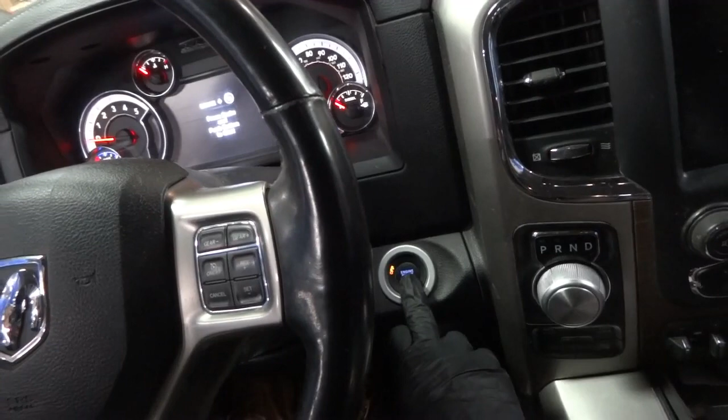Alright guys, so now we're going to confirm the customer's complaint. I'm going to step on the brake pedal and I'm gonna push this push start button. After stepping on the brake pedal, if you push this start button twice, the truck is supposed to start. So let's see what happens. I can hear the fuel pump running. I don't know if you can hear it. So I'm pressing the push start button. Nothing is happening. Okay. So customer's complaint confirmed. As you can see, the truck doesn't start. So we have confirmed the customer's complaint.

Now, one thing I noticed was when we pushed the truck inside the shop, I noticed that there are messages here on the dash. There is a message here that says service transmission. Let's wait. That message is going to be displayed right there. Service electronic brakes. And then there's another one that says service transmission. So there are a bunch of lights on the dash right now. So there's that light, service transmission, continue in drive, do not shift or turn engine off until you reach a desired location. You may not be able to shift again until serviced.

So basically what that is saying is that whatever is happening is telling the driver to drive to a service facility, because if the engine gets turned off, you can't start it again. And that's what happened actually, because when the customer got here, she turned it off. After that, it became a no crank, no start condition. Okay, so it looks like there's something going on with the transmission.

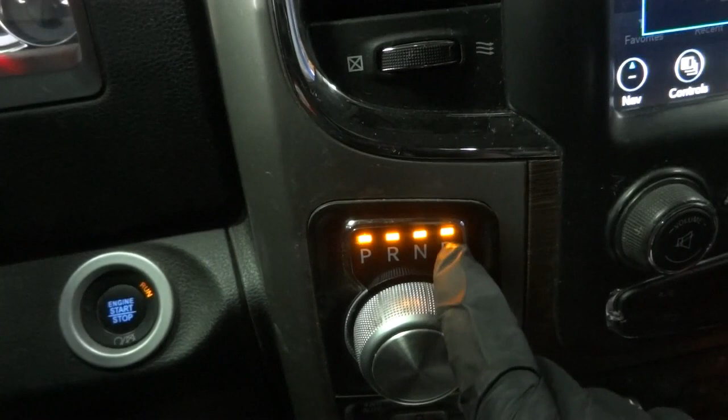The other thing I noticed is when you look here on this gear selector, you will see that all these lights are lit up. Okay, the park light, the reverse light, the neutral light, and the drive light. So basically, this tells me that there are modules here that don't know what gear the transmission is in. Okay, so we're most likely dealing with a communication problem, because you have all these lights lit up like this.

So on a good working truck, when you are in park, only the light above the P comes on. When you are in reverse, the light above the R comes on, and so on. Okay, so if you see all of them coming on like this, it means there's a problem.

So now that we have confirmed the customer's complaint, I'm going to get a scan tool connected to the truck so we can read the codes. I'm gonna connect the scan tool and then I'll bring you guys back up. Alright, so I got the scan tool connected to the vehicle, so I'm gonna bring up our scan tool here.

So I need to make sure that I mention this. Whatever is causing all these lights to come on is what's disabling the vehicle from starting, because right now the truck doesn't start because of all these lights that are on. I'm sure what's happening is that the other modules, like the ECM for example, don't know what gear the transmission is in. That's why this truck doesn't start.

Okay, so I'm pretty sure something went wrong with the transmission, or something is going on with the transmission control unit. The ECM has disabled the engine to protect the transmission. Okay, so this doesn't start. The no crank no start condition is being caused by whatever is causing all these lights to come on. Once we can figure out what the problem is on the transmission side, this truck will start. The ECM is not starting the truck because it doesn't know what gear the transmission is in.

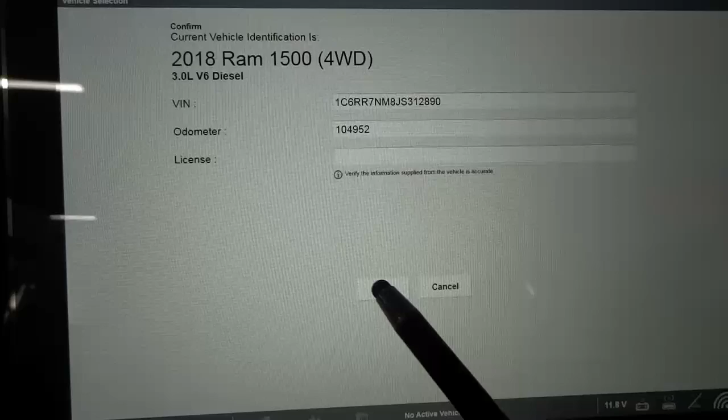So now let's scan this. Alright, so right there the scan tool has identified the vehicle, so let's click OK. Since we have a couple lights on the dash, I'm gonna do a code scan. This is gonna scan all the modules on the vehicle. So let's give the scan tool a couple seconds until it finishes. Alright, so the scan tool is done scanning all the modules on the vehicle.

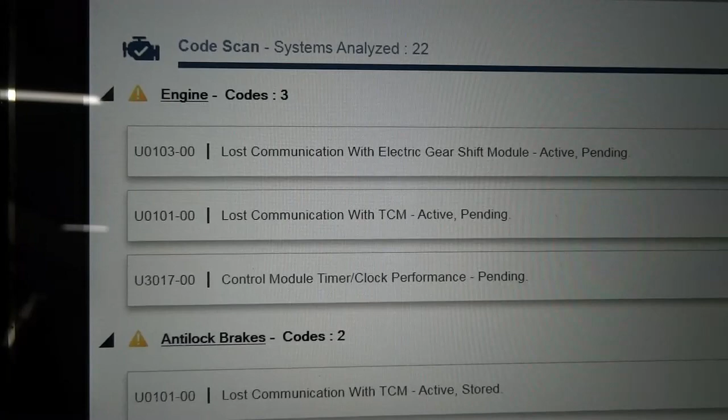So right off the bat, we have 3 trouble codes in the engine computer. The first one is U0103-00, lost communication with electric gear shift module. The other one is U0101-00, lost communication with TCM, active, pending. And the third one is U3017-00, control module timer / clock performance, pending. Okay, so we have communication codes on the engine computer.

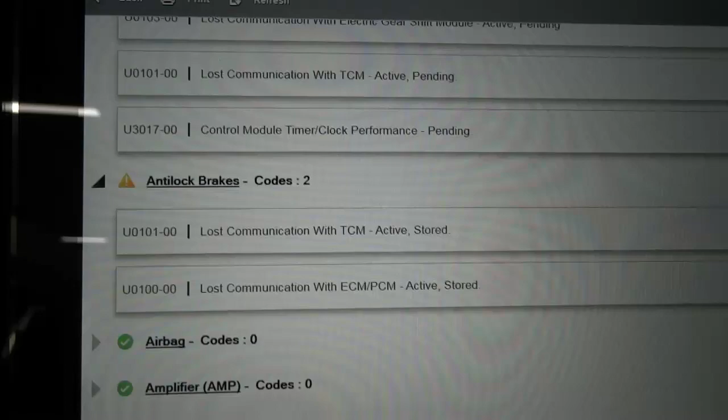So let's scroll down and see what kind of trouble codes we have in the other modules. We have 2 codes in the ABS control unit. U0101, lost communication with TCM. And then U0100, lost communication with ECM / PCM. So it looks like the ABS control unit cannot talk to the TCM and the ECM.

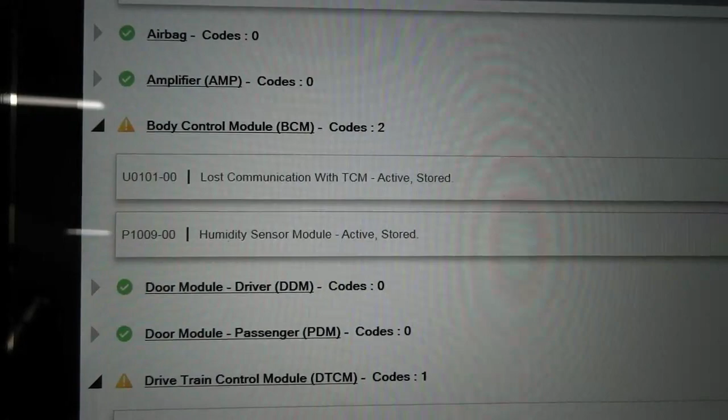We have 2 trouble codes in the body control module. The same trouble code is also here, U0101, lost communication with transmission control module. And the second trouble code in the body control unit is P1009, humidity sensor module. Let's keep scrolling. The drivetrain control module has 1 code, same trouble code, U0101, lost communication with TCM.

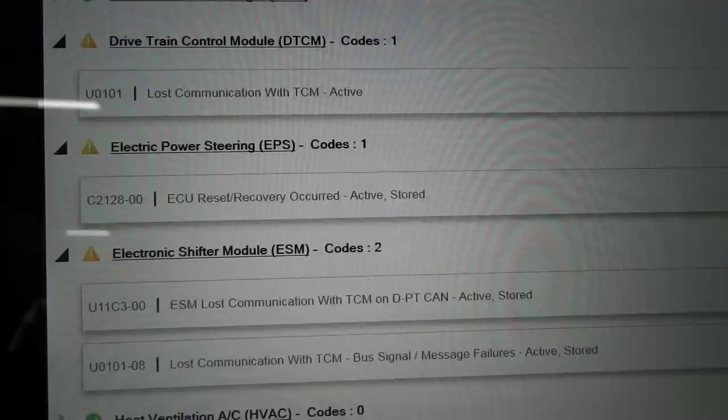Okay, so notice something here, guys. I hope you are noticing what I'm noticing. We have a repetitive U0101. This lost communication with transmission control module code is basically in every module. And same thing over here on this electronic shifter module. We have U11C3 ESM, lost communication with TCM on DPT CAN. So it looks like the electronic shifter is not talking to the transmission control module.

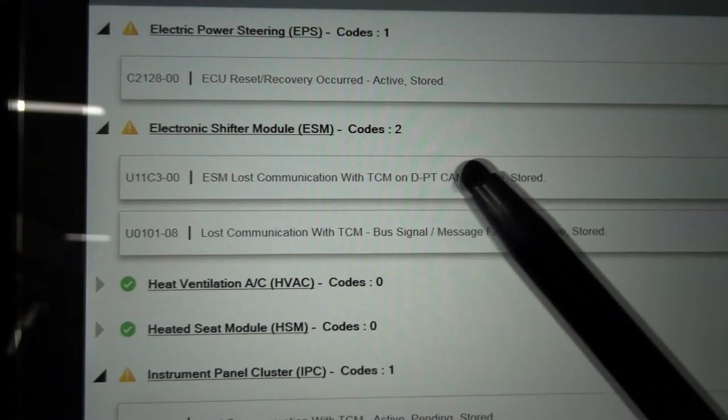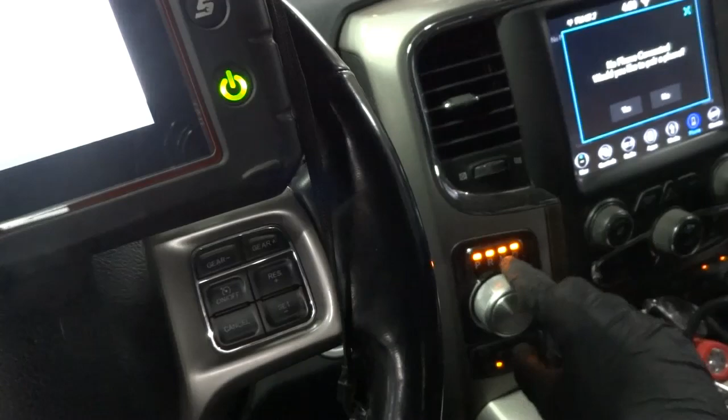So this is why we have all these lights on here on this shifter selector, because the module in the back of this is not talking to the transmission control module. That's why all these lights are lit, because it doesn't know what gear to show, because it cannot communicate with the transmission control unit, okay?

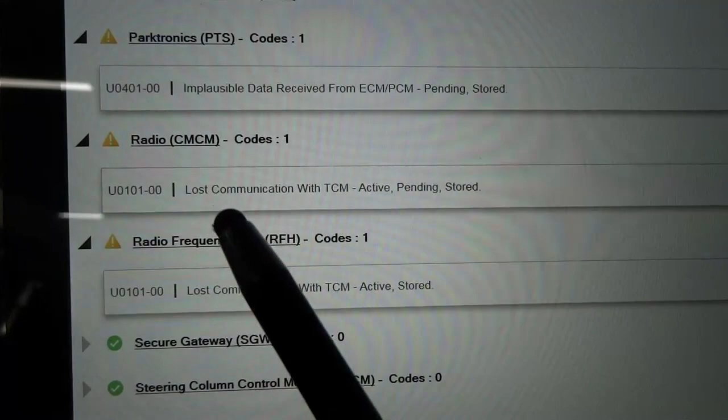And the same code is here, U0101, lost communication with transmission control module, bus signal / message failure. Same thing in the instrument panel control unit, lost communication with TCM. Even in the radio control unit, the U0101 trouble code is also found, lost communication with TCM. Okay, so this is good to know.

At this point, with this U0101 pretty much being set on most modules, I'm going to go after this trouble code. I'm gonna ignore these other trouble codes, like this one, lost communication with electric gear shift module. The electric gear shift module is this guy over here. I'm going to ignore that right now. I'm gonna go after this one because it's repetitive. You have this trouble code pretty much on all the modules.

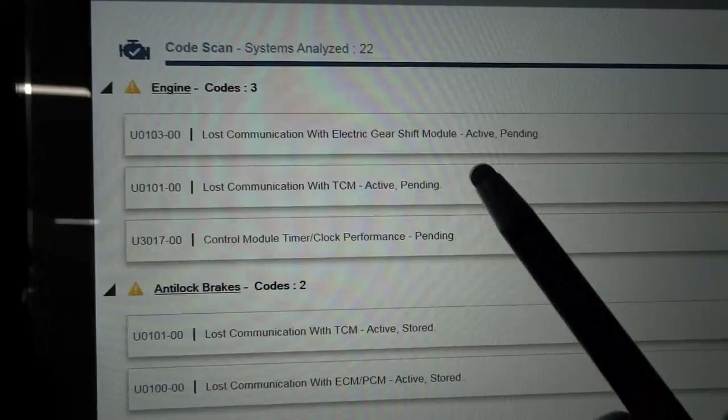And I'm sure that if the transmission control unit is not talking to the other modules, this code will most likely be set also. So this one is gonna cause this one to be set, okay? Now what I need to do is back out of here. Actually, before we back out, I wanna point out something else.

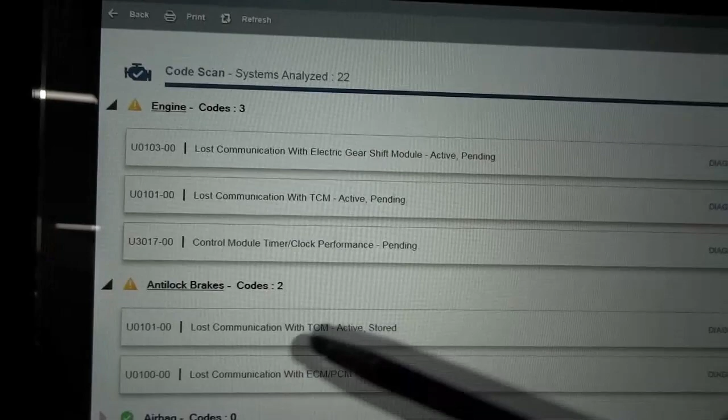I don't know if you noticed, on this list of modules, there is no transmission control module. Pretty much we have all the modules listed, but not the transmission control module. Usually the transmission control module comes after the engine. So this is the engine module, this is the ABS, but the transmission control module is missing, which means it is not communicating. So this again proves this trouble code.

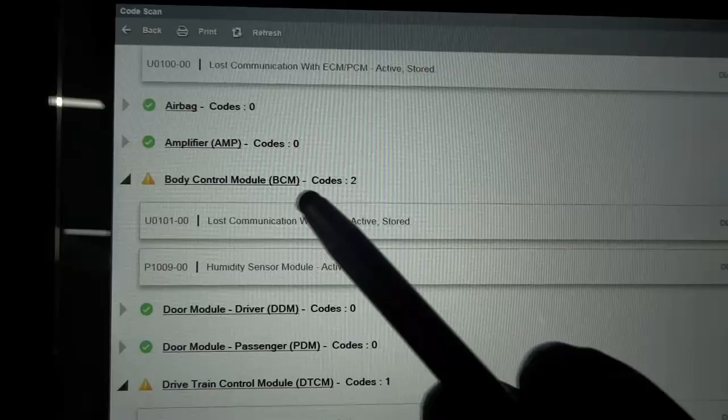If we scroll down once again, in case you didn't pay attention, you will notice that the transmission control module is not here. So airbag, amplifier, BCM, body control module, electric power steering, electronic shifter module. As you can see, pretty much all the modules are here except the transmission control module.

Okay, good. So let's back out of here. Now we have a list of all the modules that are supposed to be on this vehicle. Now, if you look over here on the right hand side, there is engine and transmission. So this is the transmission module. So now I'm going to try to go straight to the transmission module to see if the scan tool will be able to communicate with it.

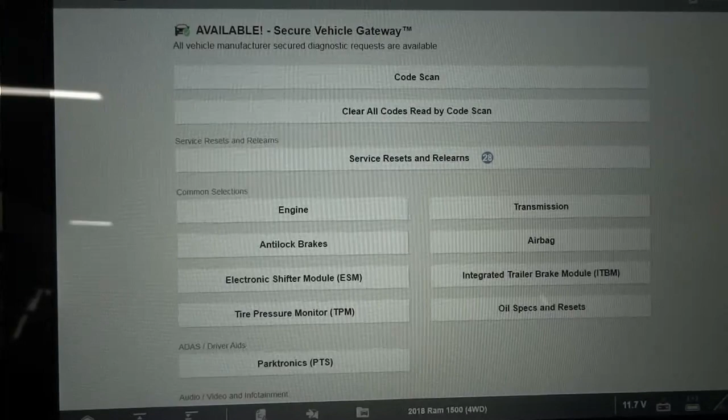So now let's click on transmission. So right off the bat, we have a message that says no communication. Is key on? Yes, the key is on, but the scan tool cannot communicate with the transmission control module. Let's try it once again. So let's exit. Let's try to talk to the engine computer. So let's go to engine.

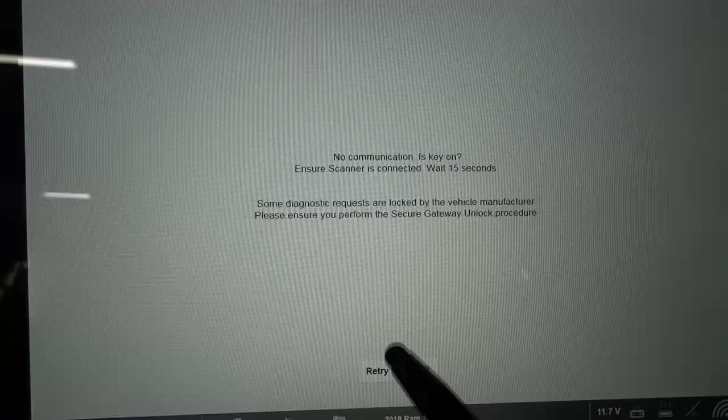So right there, once we click on engine, we get into the engine computer and we can read codes out of the engine computer. As you can see, we have 3 trouble codes in the engine computer. So let's back out and try to read codes out of the transmission control module. So let's click on that. As you can see, we have a message that says no communication. Yes, the key is on. So once again, we have confirmed our problem.

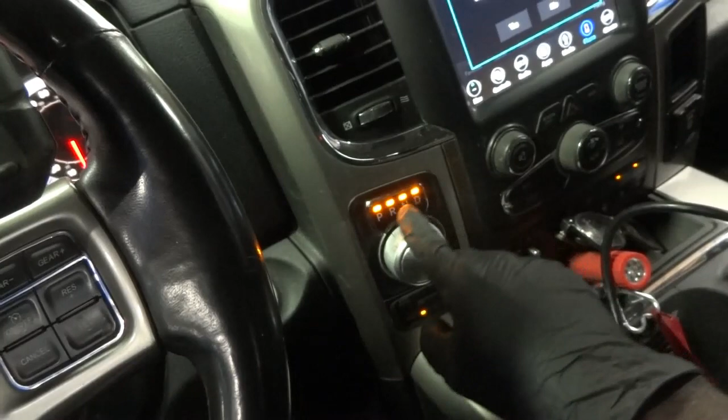So the problem here is the transmission control module that's not talking, okay? Since the transmission control module is not talking, that's why we have all these lights that are lit up over here. Now, since the transmission control module is not talking, we have to figure out why this transmission control module is not communicating with the scan tool or with the other modules on the vehicle.

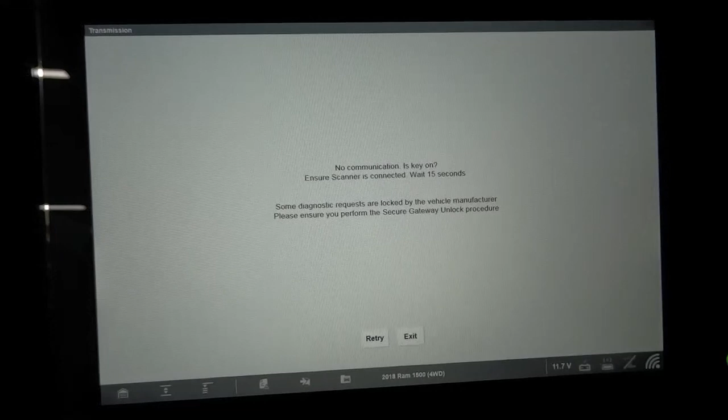Just like any computer, for it to run, you have to send power to it. So just like your computer at home, you cannot get it turned on before you plug it into the power outlet, right? So it's the same thing with computers on the vehicle. Any control module needs power and ground in order to run.

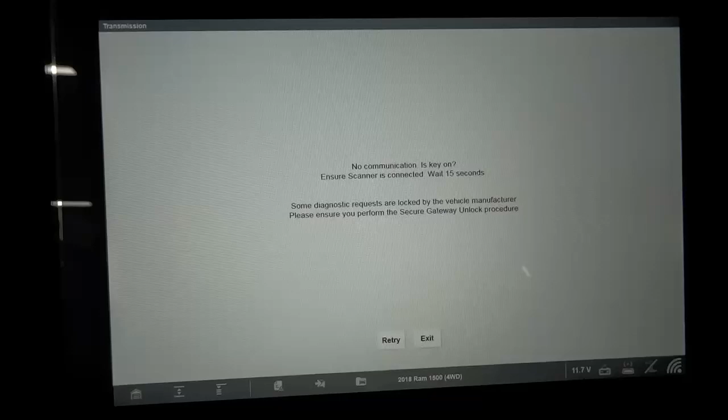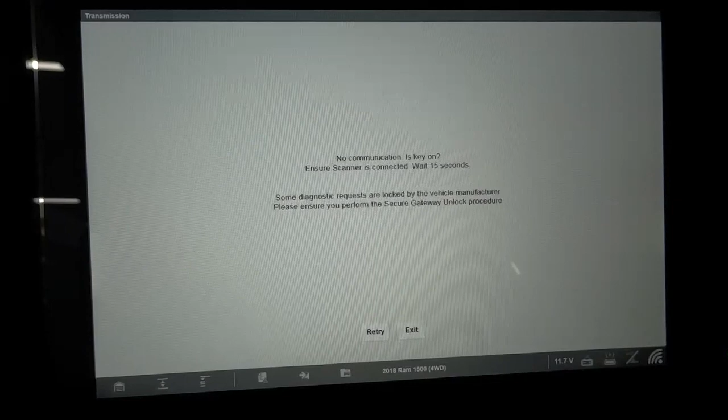So the first thing we're gonna do is we're gonna go to this transmission control module and check power and ground to make sure that this computer is being powered. If the computer is being powered and it still doesn't communicate, then at that point the problem is just a defective control unit. So let's back out of here.

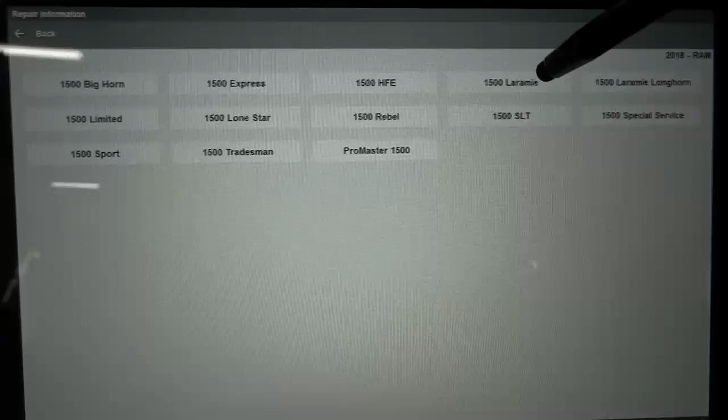Now what we're gonna do is we're gonna go to service information. We're gonna look up the transmission control unit wiring diagram. We have to familiarize ourselves with how this transmission control unit is wired, and then we will proceed with the tests. So let's go to, this is a 1500 Laramie, so it's this one. So here is the transmission control unit wiring diagram.

So the first thing we're going to do is we're going to locate the TCM on this wiring diagram first. So over here is our transmission control unit, okay, integral to valve body on transmission. So basically the transmission control module on this vehicle is part of the valve body, and this transmission control module lives inside the transmission. So that's good to know.

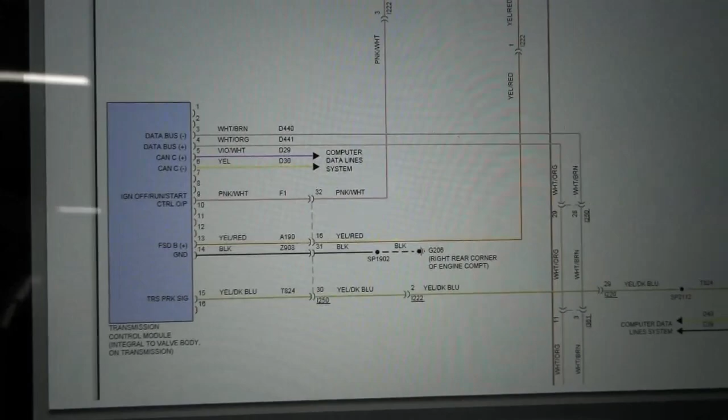Now, when we look at this transmission control module over here, it looks like it doesn't have a lot of wires. Now what we need to do is we have to find our power wires and our ground wires. So right over here we have one ground wire, so this wire over here, pin 14. So this black wire is a ground, and it's grounded at the right rear corner of engine compartment. So this has one ground wire, and then as you can see over here it says fused B positive.

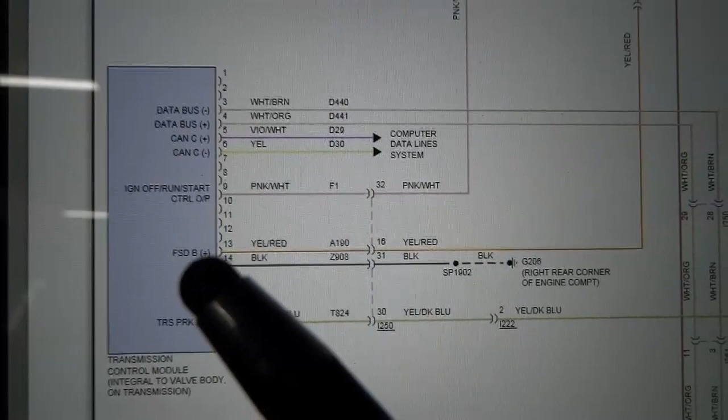So this is a power supply wire, so pin 13. It is a yellow wire with a red tracer. So there's a power supply wire here, and then there's another one over here. So ignition, off, run, start, control. So it looks like this is the ignition power feed. So this wire over here gets power when the key is turned on. And this is a pink wire with a white tracer, okay? So this transmission control module has two power wires and one ground wire.

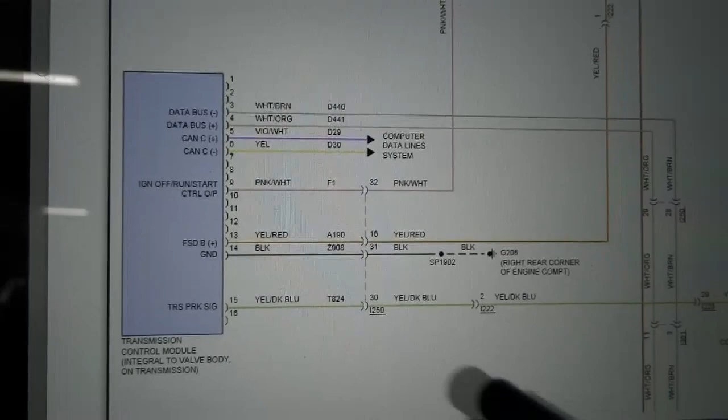And it has some communication wires over here. So at this point, we're gonna ignore these communication wires for now. Right now, we're just gonna focus on the power wires and the ground wire. That's all, okay? If there's power on both wires, and there's ground over here, then our focus is gonna shift towards the communication lines, and at that point, the problem would just be the module itself.

But for now, let's go and check these power wires and this ground wire. So this is under the truck. We're gonna have to go under the truck and get at the transmission electrical connector so we can do the test over here. Now, if you see these wires over here, if you follow these wires, you will notice that these wires go up, okay?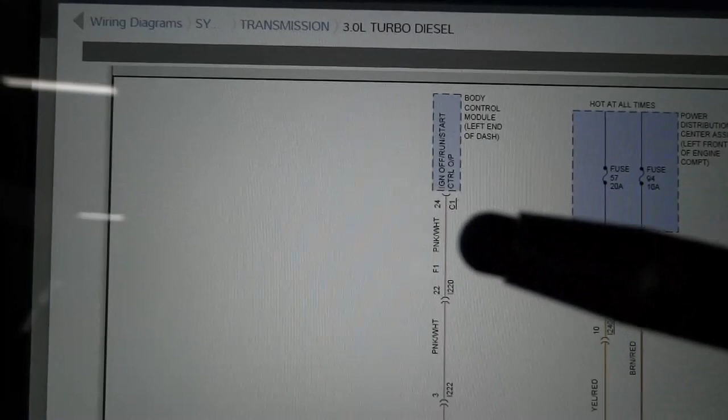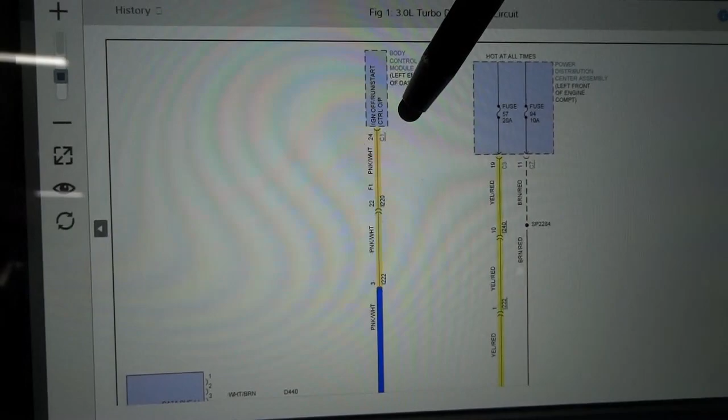And then this one over here, this wire gets power from the BCM, okay? It gets power from the body control module. So the body control module sends ignition power to the transmission control unit. Actually, let me highlight these wires, because these are the wires we're going to test. So that one wire is coming from the BCM, and the other one is coming from the fuse under the hood. As you can see here, it says power distribution center assembly, left front of engine compartment.

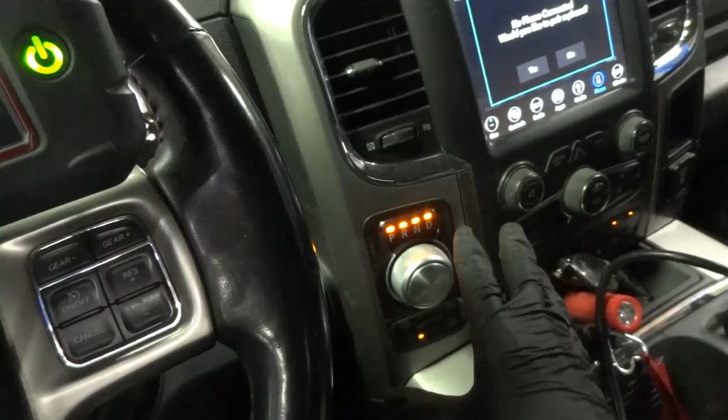Okay, let's check this fuse. We don't have to check this fuse over here, fuse 94, because this fuse supplies power. So this over here, let me highlight this. This other wire here, that fuse over there supplies power to the electronic shift module. And the electronic shift module is working. So we don't have to check that fuse, because if that fuse was open, these lights over here wouldn't have

been lit up. Okay? And as you can see, this module only has one power supply wire and one ground wire. So this is good. We're not going to check fuse 94. We're just going to check fuse 57. Okay? And it may just be as simple as a blown fuse. So let's go under the hood and check this fuse and see what we're going to find. So now let's go under the hood.

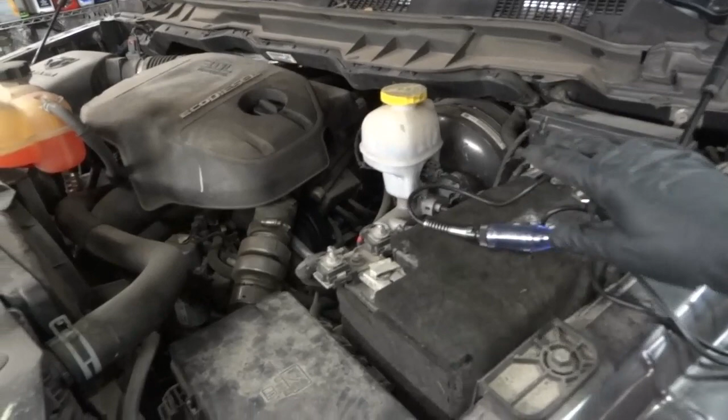Alright guys, so we are here under the hood. So I got my test light. We're gonna use this test light to test our fuse. So the key is on inside the truck. So let's test our test light first. So test light is connected to battery ground. If we touch power, the test light should light. So right there, test light is good. So now let's find our transmission fuse.

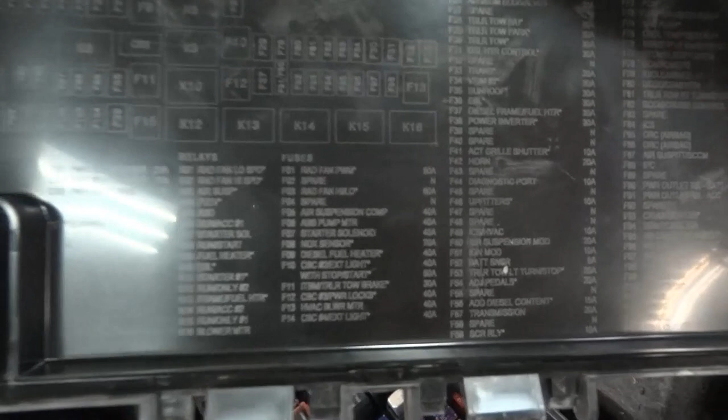As you can see, there are a bunch of fuses in this fuse box. So let's see where our transmission fuse is. So our transmission fuse is right there. Hope you can see that right there. F57, it says transmission. So that's the fuse we're gonna check. And if you look over here on this fuse layout, oops, I hope you guys can see. I'm sorry for the glare, guys. So it's right up there, fuse 57.

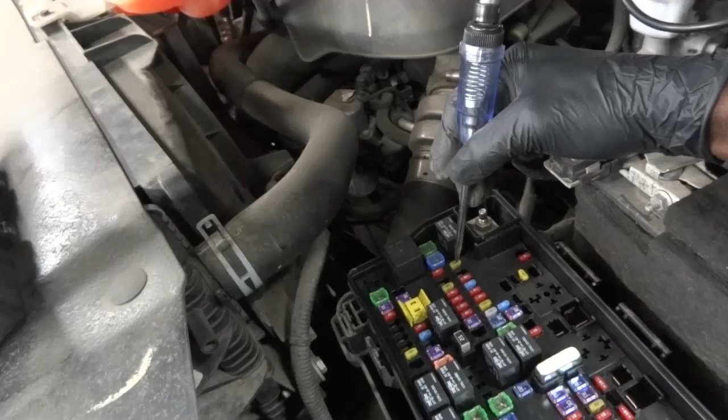So fuse 57 is this one, this 20 amp fuse. So this over here is fuse 57. So the key is on. Let's see if we have power on both sides of the fuse. So there's power there, there's power here, power here, power here. So the transmission fuse is good. So now what do you do when your fuse is good?

Well, at this point what we have to do is we have to go down to the transmission control unit and test our powers and grounds at the transmission control unit electrical connector. Okay? Because the fuse is good, but our problem is the transmission control unit is not communicating. So we cannot talk to the transmission control unit. So we're gonna go to the transmission control unit and check powers and grounds at its connector. So now let's go under the truck.

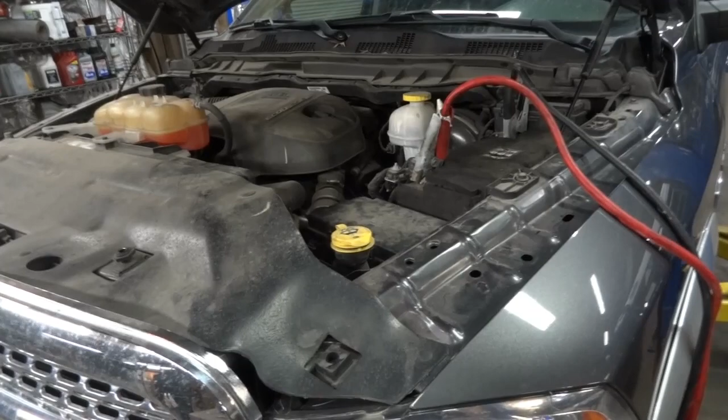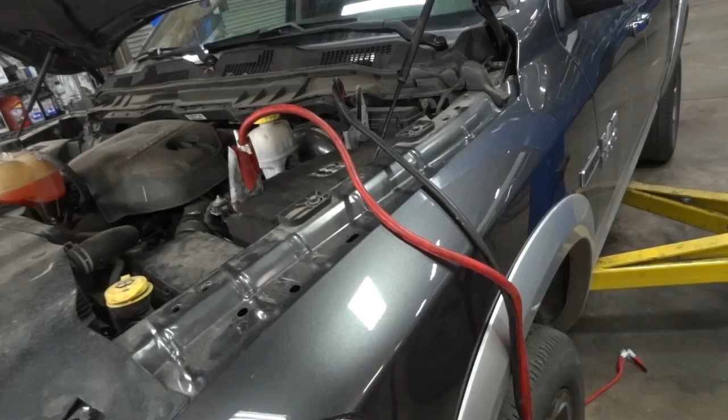So before we get the truck up in the air, I want to show you these jumper cables that I'm using. So I have the positive cable on the positive terminal of the battery, and then the black one on the negative terminal of the battery. I'm gonna use these so I can know that I have good power and good ground coming from the battery. So I will use these jumper cables under the truck to test my powers and grounds at the transmission control unit. So now let's lift the truck.

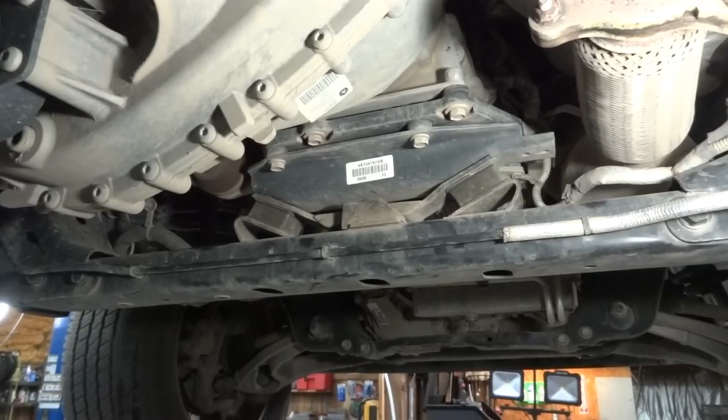Alright guys, so we are here under the truck. So here is the transmission. That's our transmission right there. And the electrical connector of the transmission control module is right over here. So this is the electrical connector of the transmission control module. And remember, as we read on the wiring diagram, the transmission control module is inside the transmission.

Okay, so now we're going to test our powers and grounds at this electrical connector. So we're going to back probe this black wire over here. So there is the black wire. So I'm gonna get it back probed and then I'll bring you guys back up. Alright guys, so I back probed the black wire, which is the ground supply wire for the transmission control unit. So we're gonna use our test light to check the ground wire.

So I have my test light connected to battery positive. If I touch ground, my test light should light. So let's touch this bolt over here. As you can see, I touch ground, my test light lights. Okay, so one side of the test light is connected to B positive. Once I touch ground, the test light lights.

So now let's test this ground wire of the TCM. So right there, I touched the back probe tool, my test light lit. So right there. Okay, so this tells me that there is ground going to the transmission control unit. Okay, so our ground is there, so that's good. So now we're gonna test our power supply wires.

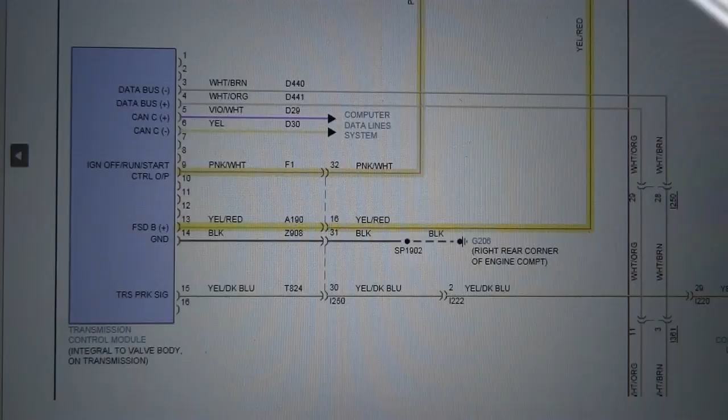Alright guys, so we checked the ground wire with the test light connected to battery positive. We touched pin 14, our test light lit. So this wire over here is good. So the transmission control unit is receiving ground. Okay, so that's good. So now we're gonna test our two power supply wires.

I'm going to back probe this pink wire with a white tracer and then this yellow wire with a red tracer. I will get these two wires back probed at the TCM electrical connector and then I'll bring you guys back up. Alright guys, so I back probed our two power supply wires to the transmission control unit. The red back probe tool is connected to the pink wire with a white tracer, and then the black back probe tool is back probing the yellow wire with a red tracer.

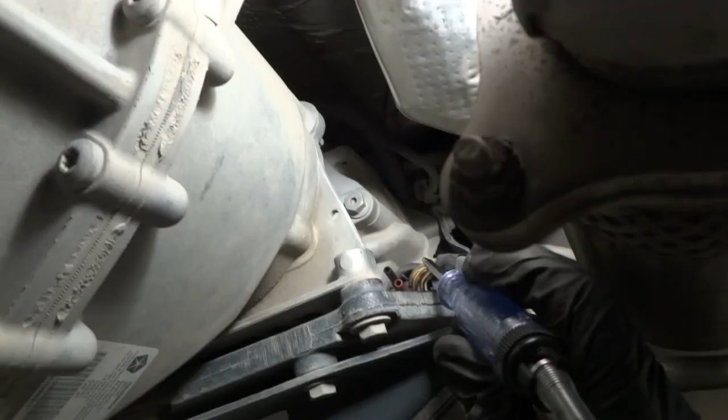Alright, so I got my test light connected to ground. If I touch power, my test light should light. So let's touch the first back probing tool. So right there, as you can see, my test light is lit. So there is power on the pink wire with a white tracer. Let's check that once again. So right there, my test light is lit. So there is power on this pink wire. So now let's test the other power supply wire.

Bam. There is a problem, guys. There is no power on the yellow wire with the red tracer. So right over here, test light lights, but on the other one, the test light doesn't light. Okay, so this is the problem, guys. We have found the problem. This is what's causing the transmission control module to not communicate, because it's just receiving power on one wire. The other wire is missing power.

And this is the wire that's coming from the fuse that we checked under the hood. And the fuse is good, okay? Since the fuse is good, but there's no power here, the problem is an open. So there's an open circuit between the fuse under the fuse box and this wire over here. All right. So here test light doesn't light, but over here test light lights. So we are missing power at the transmission control unit.

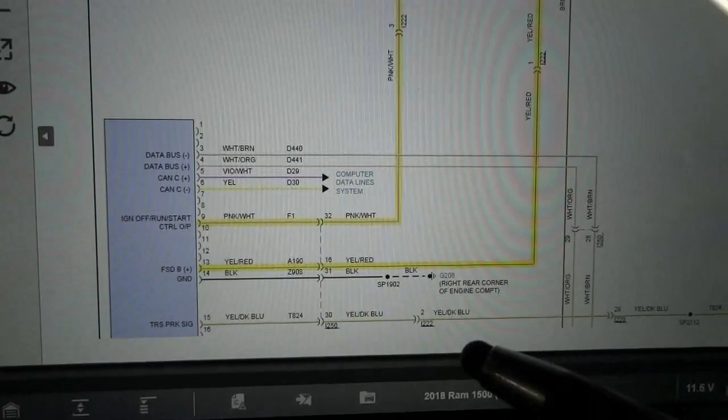So now I'm going to show you what I just did on the wiring diagram. Then we will talk about what we're going to do next. So here is what we just did. We checked the ground wire. So there's ground at the transmission control unit. We checked the power supply wires. There is only one wire that has power. And the wire that has power is this one over here, pin 9. So this pink wire with a white tracer is the only wire that has power.

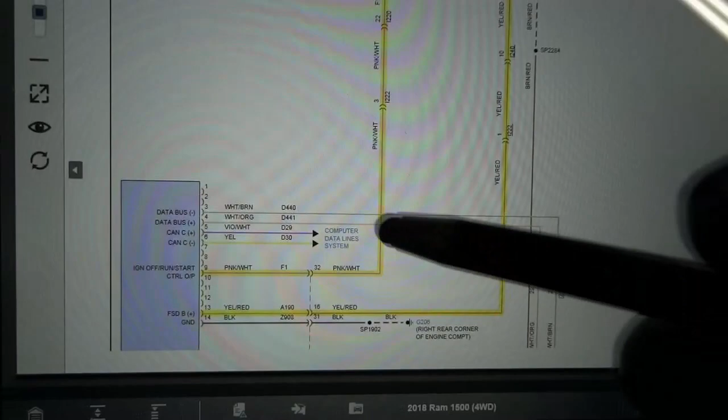But this yellow wire with the red tracer doesn't have power. And this wire is coming from the body control unit. And this wire has power with the key on. So the body control unit is definitely sending power to the transmission control unit with the key on. But this wire over here doesn't have power. And if we follow this wire, it goes to a fuse in the fuse box. This fuse over here, fuse 57. And we just checked this fuse.

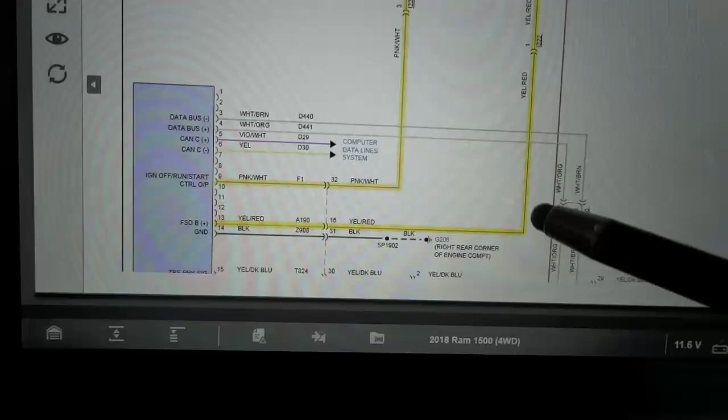This fuse is good. Since the fuse is good, but we don't have power at the transmission control unit, then the problem is an open between the transmission control unit and the fuse. So somewhere down this leg of the circuit, there is an open somewhere, okay? So that's gonna be what we have to figure out next. But for now, since this power is coming from the fuse, the wire goes basically from the fuse down to this transmission control unit.

We can actually bypass this wire with a jumper wire, so we can send power straight from the battery to the transmission control unit. We can send power here to see if we will be able to communicate with the transmission control unit, okay? If the problem is just this open on the wire here, if we send power to this wire, we should be able to talk to the transmission control unit, and this truck should be able to start.

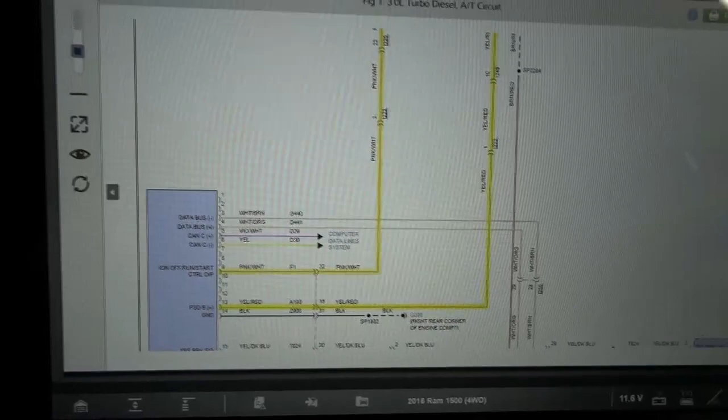Actually, before we do that, let's try to communicate with the transmission control unit. Let's go to scanner. Let's go to transmission. As you can see, we have a no communication message, so we cannot talk to the transmission control unit. So if I go to engine, watch this. As you can see, we can read codes. So we can read codes out of the engine control unit, and we have a lost communication code, okay?

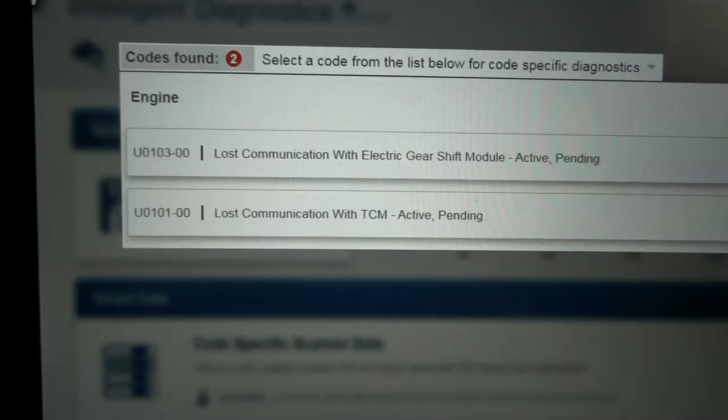Now, if we back out and go to the transmission control unit, we have a no communication message. So we cannot talk to this module. And we can't talk to the module because it's missing one power, okay? One power wire doesn't have power. So this is why we cannot talk to the transmission control module. And this is why this truck cannot start, because the transmission control module is unable to talk to these other modules. So the engine control unit cannot start the engine because it doesn't know what gear the transmission is in.

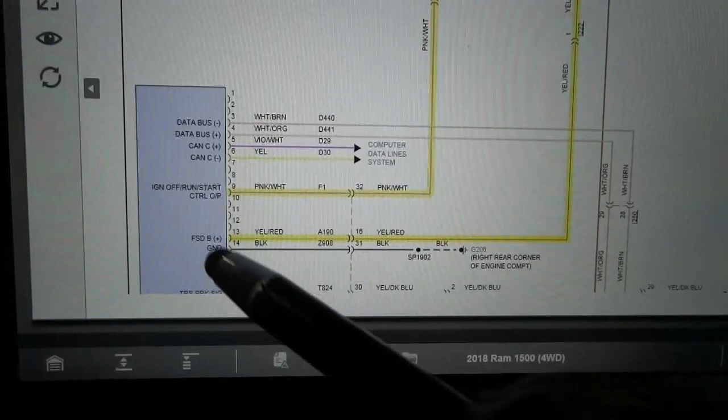So let's go back to our wiring diagram. So I'm going to bypass this wire. I'm going to send straight power to this pin over here, okay, pin 13. After I send power here, I'm sure we will then be able to talk to the transmission control unit, and after that, I'm sure the truck will start, okay? After we start the truck, then our problem will just be finding the open in the circuit. We're gonna find where the open is and fix the open, and after that, this vehicle will be fixed, okay?

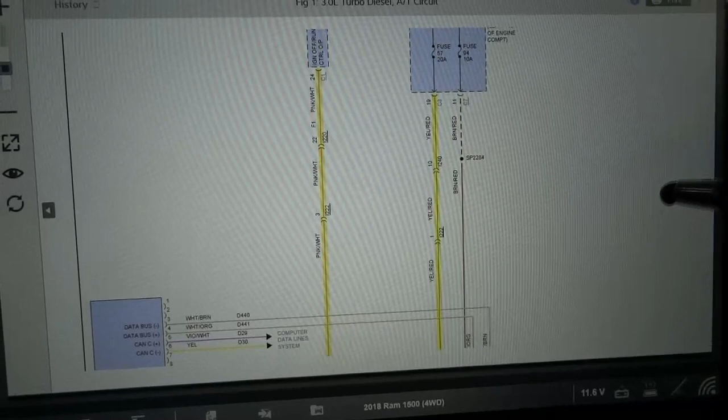So now what I'm going to do is I'm going to use a jumper wire to send power, okay, to this pin over here. Now, since I have my long jumper wire coming from under the hood on the battery, I'm going to get some jumper wires, okay, and connect them to my back probe tool over there, so we can send power to that yellow wire that's missing power. After we send power there, we will be able to talk to the transmission control unit. So I'm gonna send power to that pin.

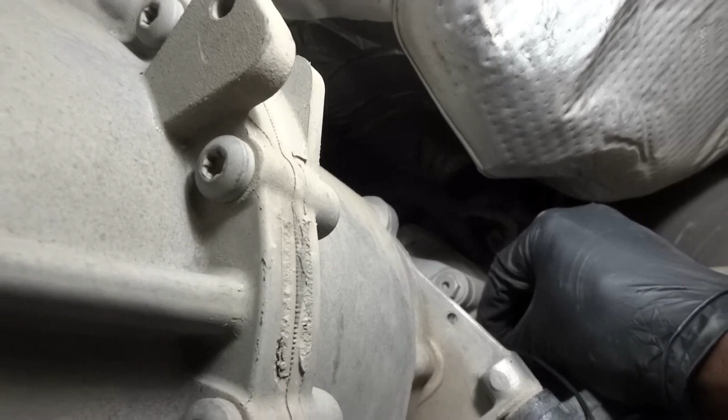All right, so I'm gonna connect this jumper wire to this back probing tool over there. So right there, I'm connecting to that back probing tool that's connected to the yellow wire. So now this is gonna go to my power wire coming from the battery. So I'm gonna connect this guy over here. So right there. Now I'm sending power straight from the battery to that wire that's missing power.

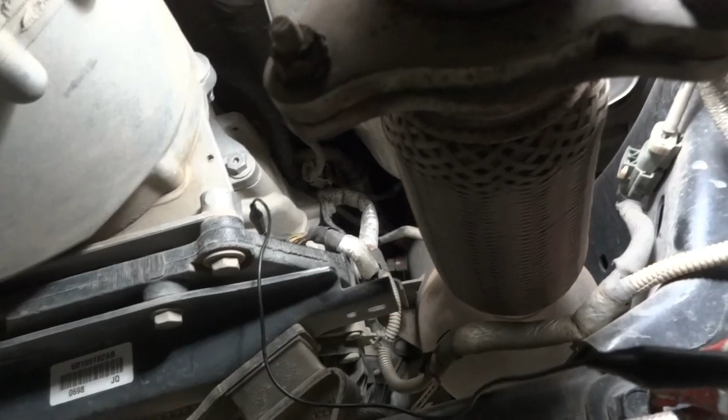So now if that's the only problem that this vehicle has, we should be able to now talk to the transmission control unit, and after I erase the trouble codes on the scan tool, all the lost communication with the transmission control unit trouble codes will go away. And if we go inside the truck, we should be able to start the truck now. So now let's look at the scan tool. Remember before we could not talk to the transmission control unit, so now let's see if we can talk to it.

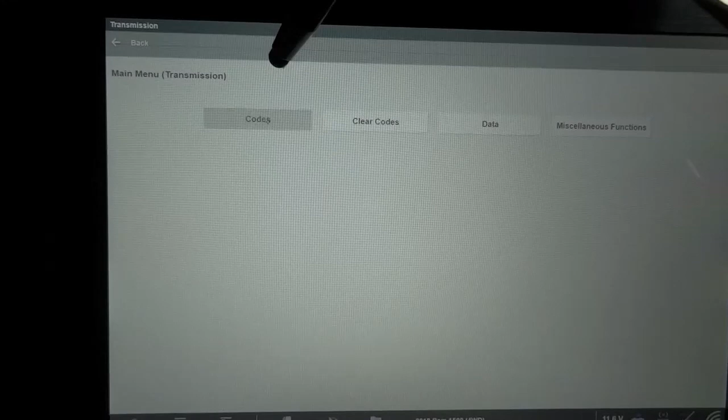So right there, now we are inside the transmission control unit. So this is the problem, guys. As you can see, we don't have any trouble codes in the transmission control unit. So let's back out. So that's good. Remember before, when we clicked on transmission, we had a no communication message. But watch this. Once we click on it, now we can get inside the transmission control unit. Okay, so that's good. At this point, this truck should be able to start.

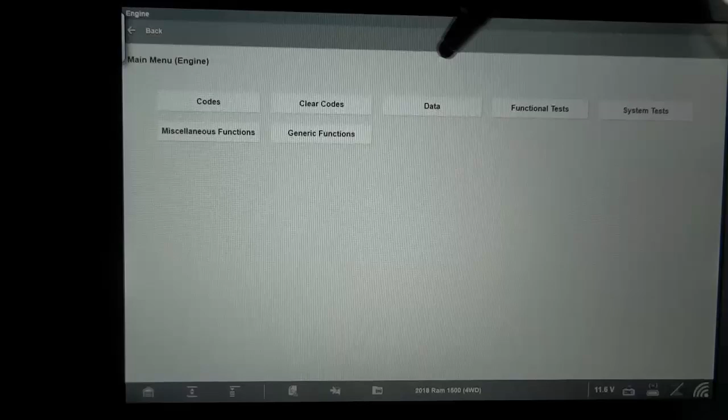Let's back out. So let's go to the engine computer. Let's see if we still have that lost communication code. So these codes are still here. So now I'm going to back out and erase these trouble codes. Let's see if these trouble codes will now go away.

Alright, so let's read the codes. Bam. Now we no longer have any trouble codes in the engine computer. So this is good, guys. If we go inside the truck, this truck will start. Okay, so we're gonna leave this jumper wire over there. I'm gonna lower the truck, then we're gonna go inside the truck to start it. I know right now the truck is gonna start.

After we start the truck, then the next thing will be finding the open. We gotta find where the open is in the circuit. Once we find the open and fix it, this vehicle will be fixed. So now let's go inside the truck and start it. Alright guys, so we're back in the truck. Now we're gonna see if jumping that power supply wire has fixed the problem. If our problem was just that power that was missing on the transmission control unit, now this truck should start.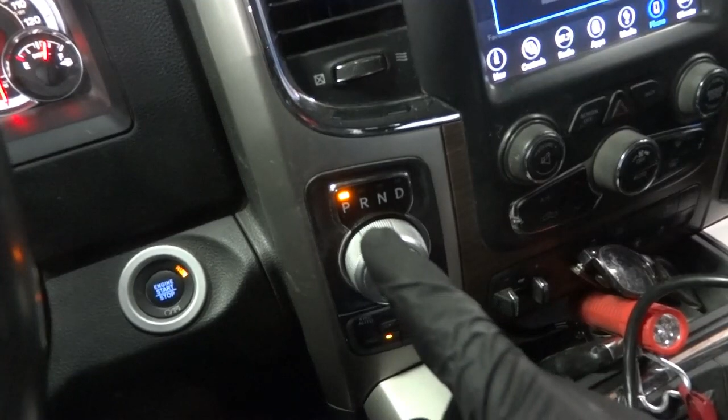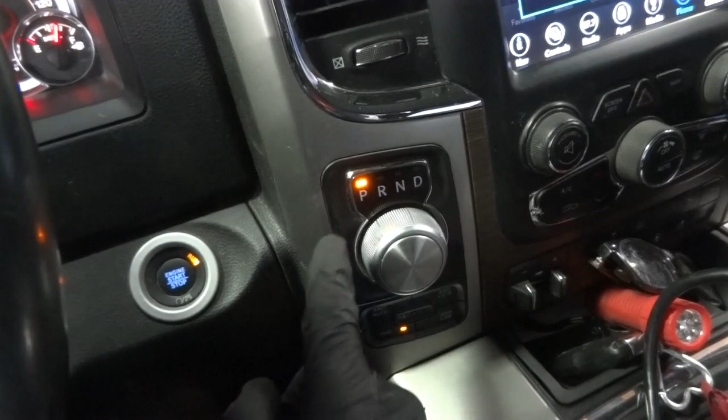Now, right off the bat, there's one thing I noticed. I'm gonna show it to you. Look at this. What do you see here? Remember, before, with the open in that power supply wire, all these LED lights over here were lit up, okay? All the lights on these gears were lit up. But now, only the light above the park is lit up. So that means now the transmission control unit is communicating. I mean, we already checked that with the scan tool.

And the shifter selector module also is able to communicate with the transmission control module, so it knows what gear the transmission is in. Since it knows what gear the transmission is in, now the truck should be able to start. So this here already tells me that this is fixed. Remember, we had all these lights that were lit up, but now only one is on, so this is good. So I'm gonna step on the brake pedal and push the button, so this truck should start. So right there. Okay, the truck is running and there are no lights on the dash.

Okay, so the truck is now running. So this is fixed. Now what we need to do is find the open in the circuit, in the power supply wire. Okay, we have to find where the open is. All these lights are no longer lit up, so let's turn it off. Okay, engine off. Let's start it. So right there. Okay, so engine is running.

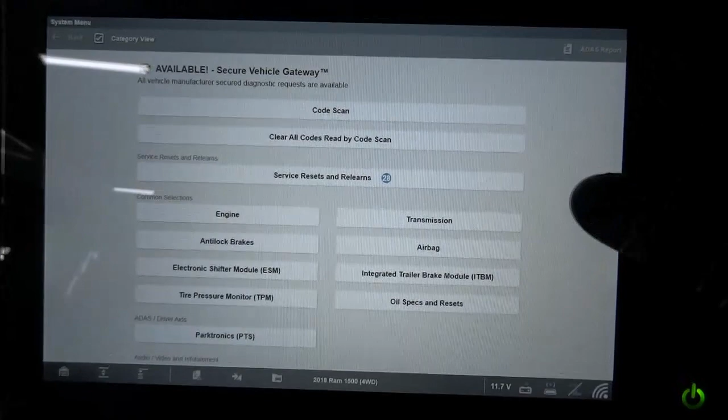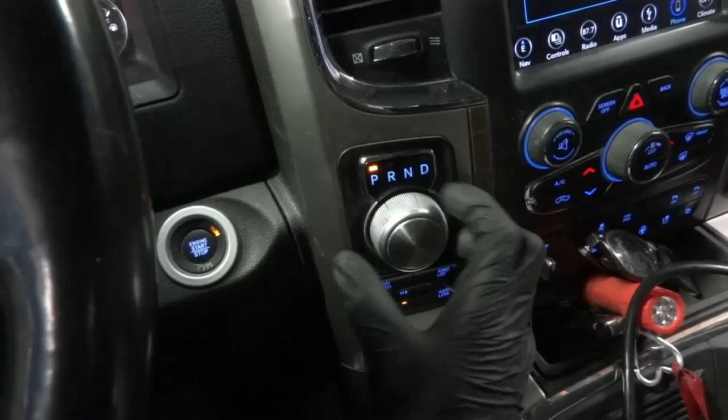Let's bring up our scan tool. If we go to transmission, we can talk to the transmission control unit. There are no codes in the transmission control unit, so we're good. Okay, only one light is on. So now I'm gonna step on the brakes. If I go to reverse, the light will move from park to reverse. Watch this. As you can see, we are in reverse, neutral, drive. Okay, so this is how it's supposed to be. Now park, that's awesome. But when there is a fault, then all these lights come on.

So let's do one thing before we find the open on that wire. Let me turn off the truck. Okay, as you can see right now, only this light is on, the light above the P. Okay, just this one is on. Let's start it once again. Awesome, it's fixed. So I'm gonna turn it off. Now I'm gonna go under the truck and disconnect that jumper wire that we connected.

So once we disconnect that jumper wire that we connected to the back probing tool, now all these lights will be lit up, because now the fault will be present, which is an open in one of the power supply wires. So let's go under the truck and disconnect that jumper wire that we connected to the yellow wire with the red tracer and see what happens.

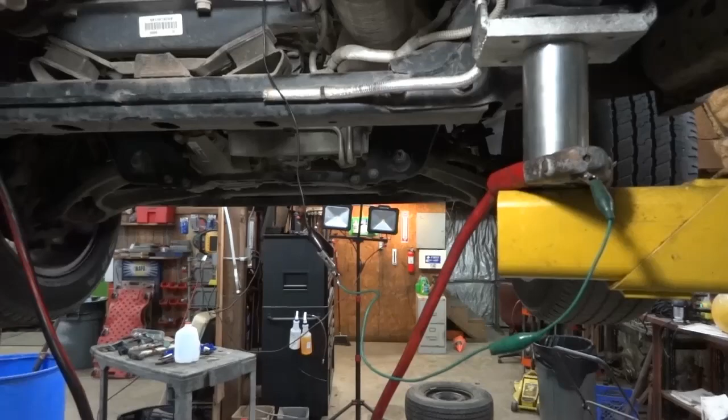Alright guys, so we are back under the truck. As you can see, I'm sending power to the yellow wire with a red tracer through these jumper wires over here. So we are bypassing the whole wire with these small jumper wires. Now I'm going to disconnect these jumper wires and remove the power that I sent to the yellow wire. So let me remove this. Okay, so the jumper wire is disconnected. I'm sure right now with these jumper wires removed, our fault will be back. So now let's go inside the truck.

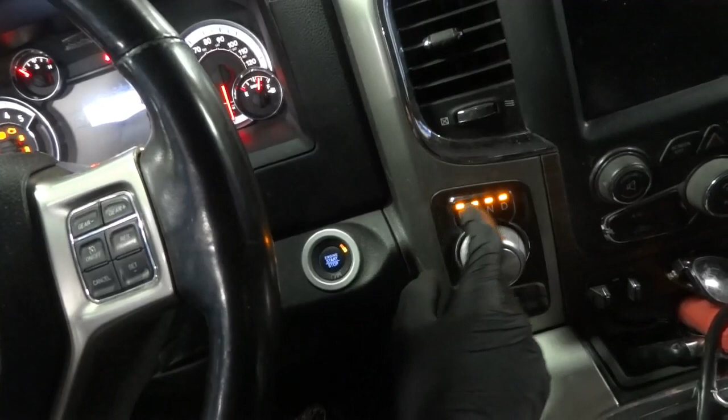Alright guys, so we are back in the vehicle. At this point, I'm just duplicating the fault, okay? We already know that's the problem, that one wire is missing power, so it's open somewhere. The next step will be finding the open. I have disconnected the jumper wires that I installed, so now let's see if the truck will start. I'm sure right now we cannot communicate to the transmission control unit, and all these lights will now be lit up. So watch this. I'm gonna try to start it. Right there. I'm pressing the button, nothing's happening. Okay.

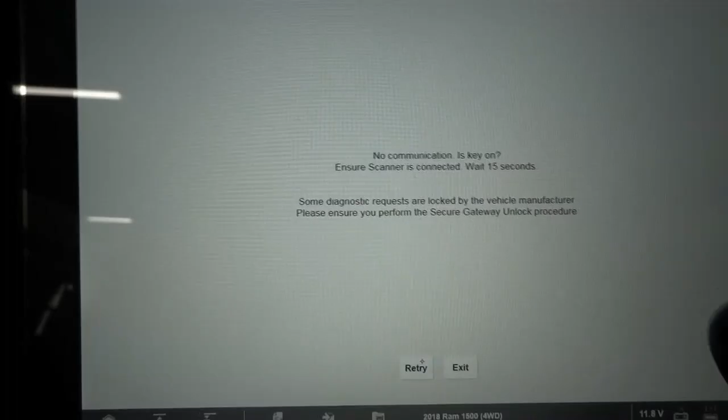Okay. So now it is a no crank, no start condition. And as you can see over here, all these lights are lit up. Now, if I bring my scan tool, remember when we went to the transmission control unit, we were able to read codes out of it. Now let's go to the transmission control unit now. Right there, no communication, okay? So now we cannot communicate with the transmission control unit. So let's back out.

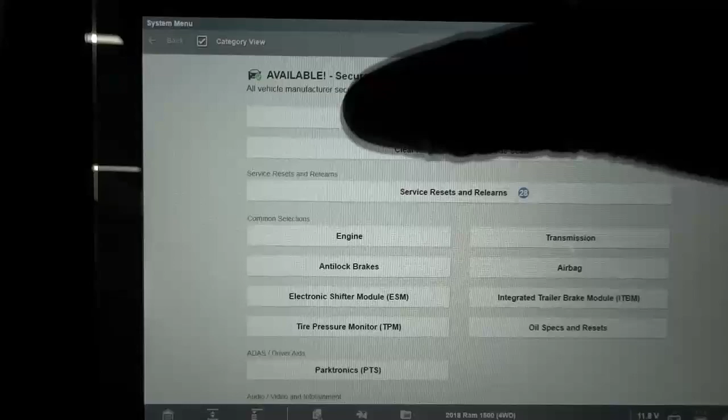Now let's go to the engine computer. I'm sure now we have a U0101 trouble code that we had before that said lost communication with TCM. I'm sure that trouble code is back. Watch this. So right there, U0101 lost communication with TCM. Okay, so we have duplicated the fault. We know 100% that that's all it needs. Once we fix that power wire, this will be fixed.

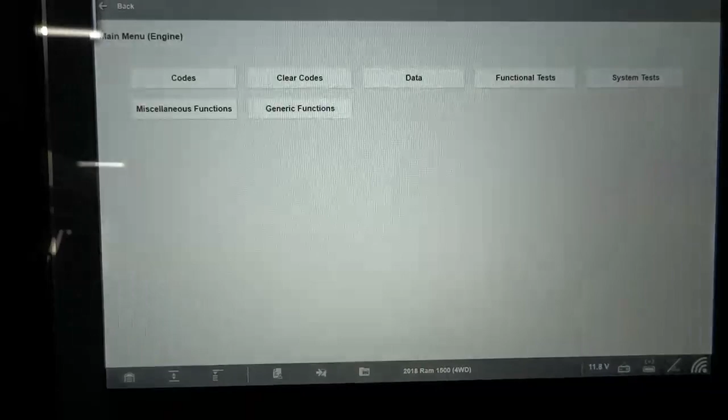Okay, now let me back out and let me try to erase this. Since it's a hard fault, it's not gonna get erased. If we read the codes again, you will see that the trouble code is still there. Okay?

Alright. So now let's go under the truck and reconnect the jumper wire again. I'm sure once we reconnect it, if we come back in the truck, these lights will be off. Only the light above the P will be on and the truck will start. As you can see right now, I cannot start it. So let's do this once again. Let's go reconnect the jumper wire and start it one more time, and then we will find the open in the wire. So let's do that.

Alright, so we're back under the truck. So now I am going to reconnect this jumper wire to this power wire over here that's coming from the battery. Once I reconnect this, we should be able to start the truck. So right there, let's go inside the truck and start it once again, and then we'll come back down here to look for our open in the circuit. So now let's go inside the truck.

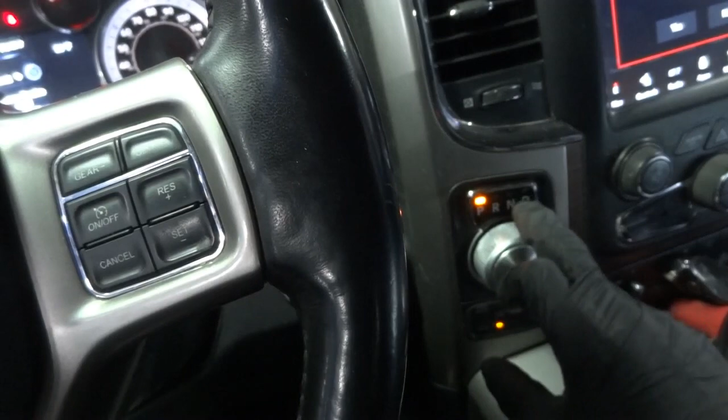Alright guys, so we're back in the truck. So right off the bat, I can see a difference. As you can see right now, all these lights that were on before are no longer on. Only the light above the P is on, which is showing the gear the transmission is in. Okay, so now we're good. Again, at this point, I'm just duplicating the fault. We know that the yellow wire is missing power, so there's an open in that yellow wire. So now that we are bypassing this wire again, the truck should be able to start. So let's try to start it. So right there, truck is running. So I'm gonna turn it off.

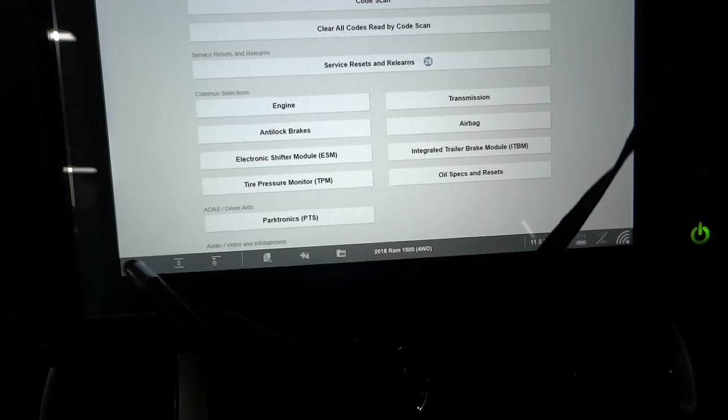Okay, so if I bring up our scan tool, we will see that we're gonna be able to talk to the transmission control unit. So right there, as you can see, we are able to talk to the transmission control unit. Okay, so that's good. We duplicated our fault once again. So the problem is an open wire on the other wire that supplies power to the transmission control unit. So this wire over here, because as soon as we bypass it, the transmission control unit starts to talk, the truck starts, and everything is fine. So there's an open between the transmission control unit and this fuse up here.

Okay, so now what we need to do is we have to go under the truck and find where this open is. We're gonna look along the transmission wiring harness and look around all the contact points, because opens and shorts will usually occur where the harness is touching something, whether it's touching the transmission or the body, because over time those contact points can move and the harness can rub against the body or the transmission itself, and you can have opens there. Or a connector also can be dirty or corroded. That can also cause an open. So let's go under the truck and find this open.

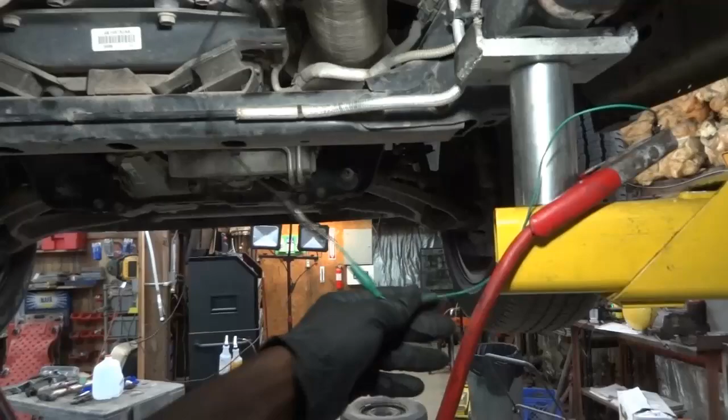So this is going to be the fun part. I'm going to leave the key on. So let's go under the truck and find this open circuit. So we're back under the truck once again. So I'm going to remove this jumper wire that I put over here. Okay, I can actually hear the beep inside the truck, so our fault is now present. So let's remove these jumper wires that we put over here.

So right now, let's look around the transmission and see if we're gonna find any obvious signs of the wiring harness rubbing against the transmission itself. So the harness over here, for example,